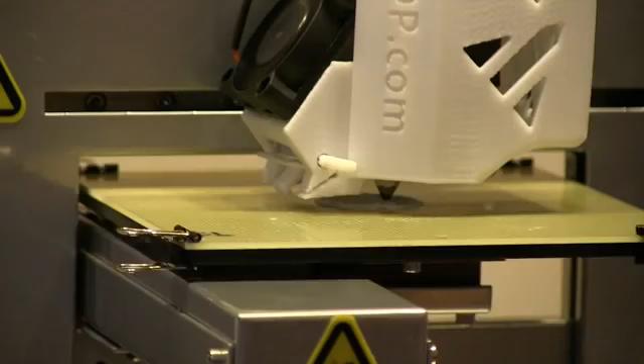Given that 3D printing is already a multi-billion-dollar industry, more and more companies are keen to get involved. Aside from 3D printer manufacture, several business opportunities now present themselves, notably including enhancing product design, transforming traditional production, direct digital manufacturing, and facilitating personal fabrication.

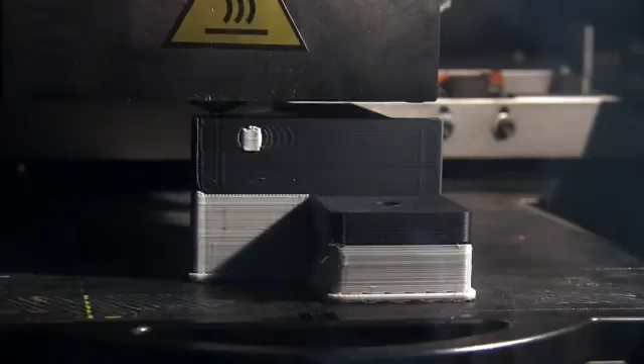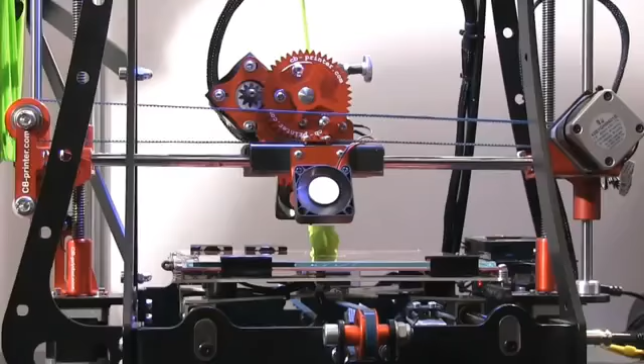Today, most large manufacturers use 3D printers to create rapid prototypes that speed or otherwise improve their product design. The use of 3D printing for this purpose is therefore not revolutionary. This said, as desktop 3D printers get cheaper, more accurate and more reliable, opportunities are starting to exist to create concept models and prototypes far earlier and far more frequently.

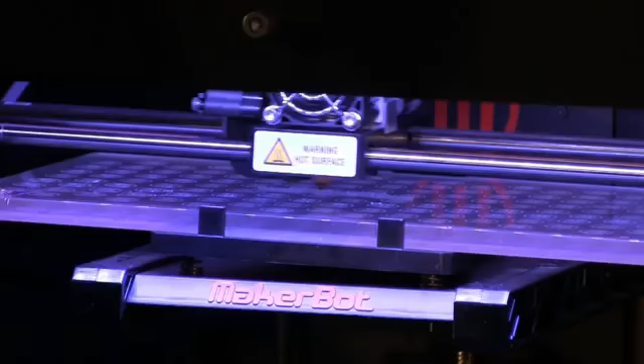Only a few years ago, an industrial stereolithographic 3D printer cost at least $100,000. And yet, in November 2013, a desktop model called the Form 1 will start shipping for $3,299. It's also been reported that some Ford engineers now have MakerBot consumer 3D printers on their desks.

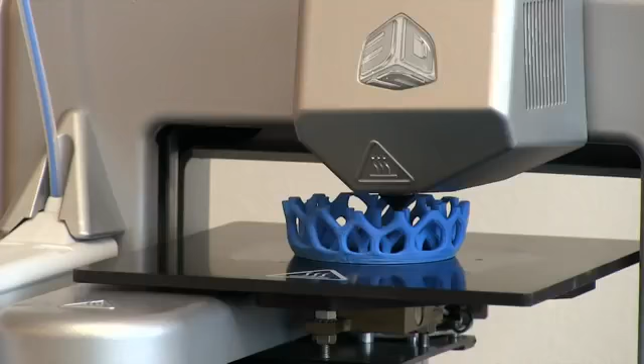The question for manufacturers is therefore not whether they're using 3D printers in product design, but where and how frequently. Just as personal computers escaped from corporate data centers in the 1980s and 1990s, so today it's time for 3D printers to invade a great many offices.

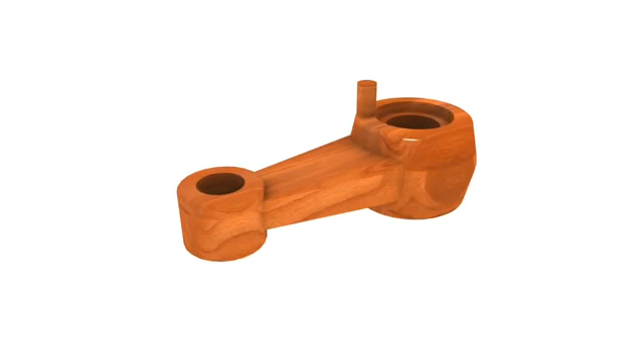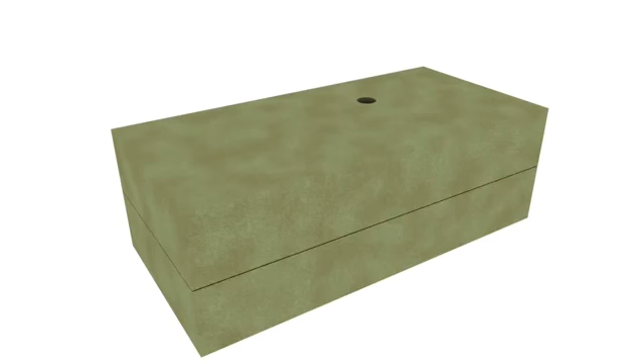Many traditional manufacturing processes are costly and time-consuming to tool up. For example, the production of metal parts using sand casting requires a pattern to be created around which sand is packed. The pattern then needs to be removed from the sand, which often requires the mould to be broken apart and reassembled. Molten metal is then poured in, which cools solid, and the sand is broken away to reveal the final part.

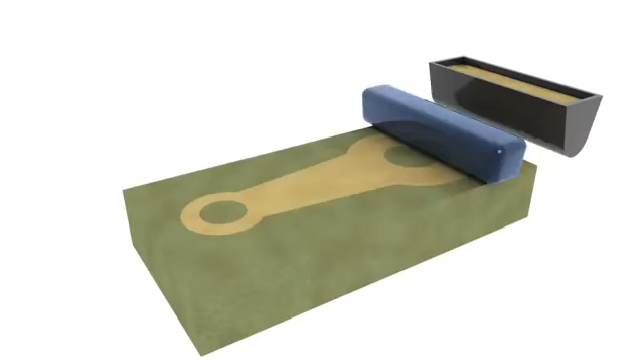Today, 3D printers from pioneers including ExOne and voxeljet allow for patternless sand casting. Here, layers of casting sand are laid down and selectively sprayed with a foundry-grade resin. This allows the direct and rapid creation of sand casting moulds into which molten metal is then poured.

By 3D printing sand casting moulds, manufacturers can save a great deal of time and money. For example, the US Navy has managed to reduce the lead time for producing submarine compressor pumps from 51 weeks to 8 weeks, and the cost per unit from around $29,000 to $18,000.

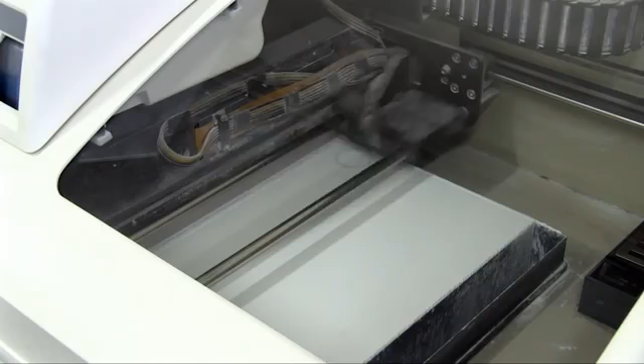Across many industries, similar opportunities exist to use 3D printing to reduce the time and cost of mould making or other production tooling, and this is something that no manufacturer ought to ignore. In the short and medium term, it's also the area of industrial 3D printing application with by far the greatest business potential.

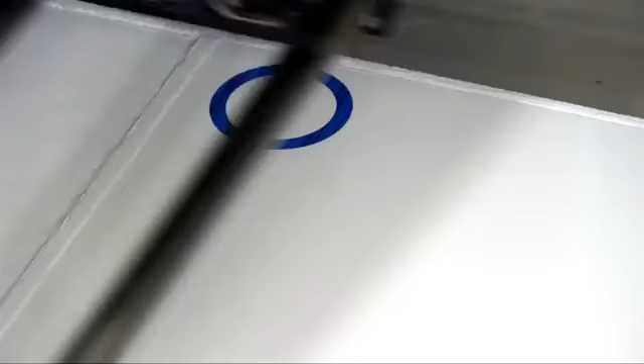As several pioneers now demonstrate, opportunities already exist to directly 3D print some final products or parts thereof. For example, Nervous System 3D prints lamps and many items of jewellery. Via an app on the Nervous System website, customers can even create custom products, which Nervous System then gets 3D printed in nylon using the Shapeways 3D printing service.

Another artist using 3D printing to create her products is Bathsheba Grossman. As she explained, with the advent of 3D printing, this is the first moment in art history when sculpture can, in a sense, be published.

Other pioneers include Makie and That'sMyFace.com, both of whom are using 3D printing in toy manufacture. On the Makie website, customers design their own unique dolls that are then 3D printed. Meanwhile, over at That'sMyFace.com, customers upload a front and side image of their head, which can then be 3D printed and added to a range of action figures.

Other companies creating customized products using 3D printing include Protos Eyewear, who are 3D printing spectacle frames, and Bespoke Innovations, who 3D print fairings for prosthetic limbs.

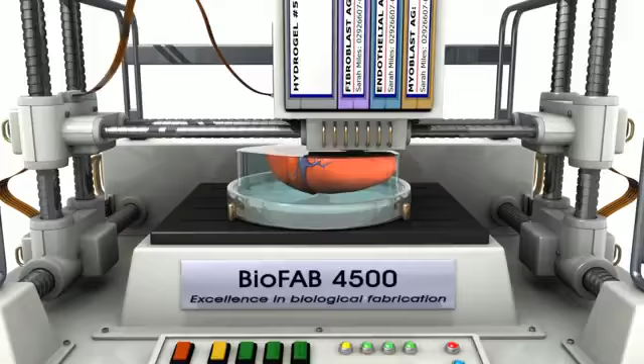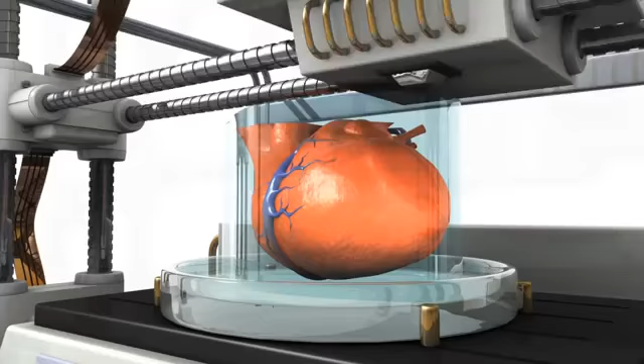Another and quite distinct form of direct digital manufacturing is bioprinting. Here, specialist 3D printers lay down layers of cells that fuse together to create replacement living tissue. Already, pioneers including Organovo have managed to bioprint human arteries and liver tissue.

At present, applications are limited to the creation of tiny tissue samples for drug testing. But within a decade or so, we should expect the first use of bioprinted materials in transplant surgery. In time, healing wounds by bioprinting directly onto the body may also become a possibility, something that is already being worked on at the Wake Forest Institute.

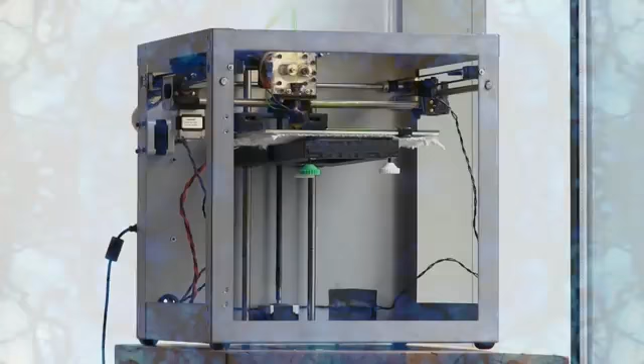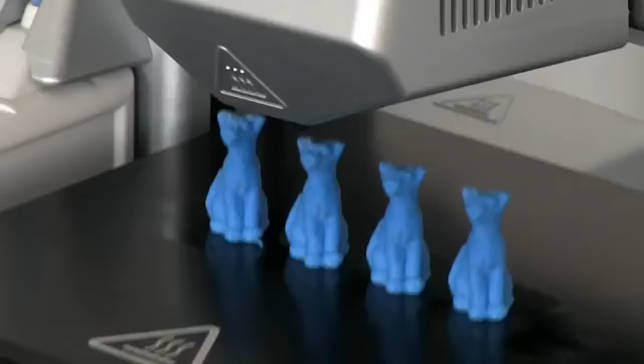Personal 3D printers can now be built or purchased for a few hundred dollars. As such hardware enters the mainstream, more and more people will be 3D printing things at home, and smart businesses are already starting to recognise this fact.

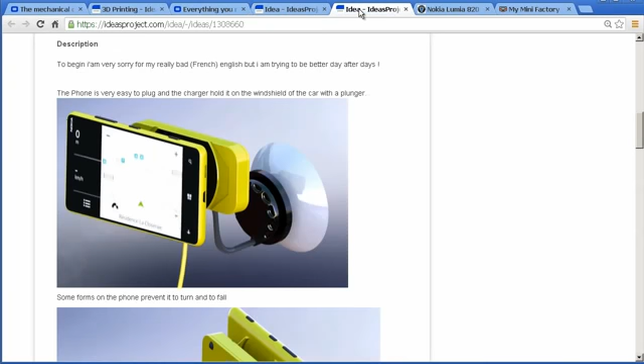For example, in January 2013, Nokia released a 3D printing development kit for its Lumia 820 smartphone that allowed anybody with 3D printing skills to produce a custom casing. And within only a few days, 3D printing enthusiasts were exchanging and showcasing their designs.

In addition to helping customers modify, personalise and repair their products, many organisations could very easily start to offer promotional 3D object downloads. Today, free apps or screensavers are common giveaways, and within a year or so, any marketing campaign that does not include 3D printable content will be missing an easy trick.

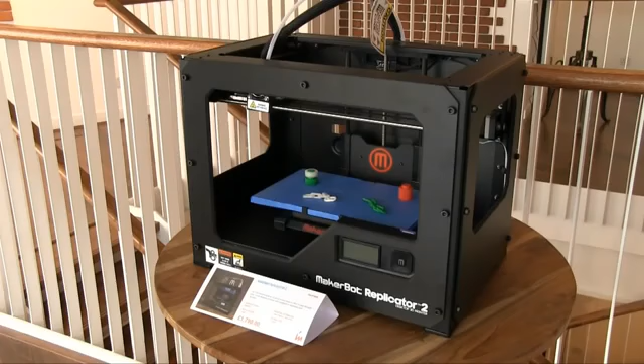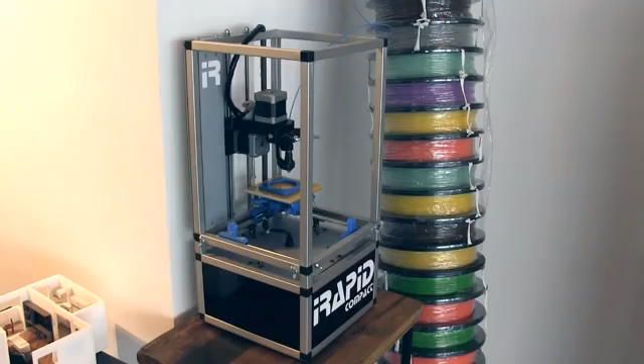In retail, there are also opportunities to start selling both consumer 3D printers and consumables, as well as 3D printing and scanning services. In 2013, some of the first 3D printer stores opened around the world. But right now, most people do not live near such a retail location, leaving a massive hole in many markets.

So, what do businesses need to know about 3D printing right now? Well, here are just a few of my own predictions.

Firstly, 3D printing will drive a revolution, but it will not replace most traditional manufacturing methods. Rather, within 10 years, I estimate that 3D printing will be used directly or indirectly in the manufacture of about 20% of products or parts thereof.

Secondly, the desire to achieve material savings will drive the adoption of 3D printing in many industries. This is due to the fact that 3D printing is an additive rather than subtractive process that can achieve minimal wastage. Thirdly, within a decade, scanning and digital inventory will have a big impact on spare part availability and product repair.

Fourthly, opportunities will increasingly exist for customised products with one or a few 3D printed parts. Today, far too many people are dismissing 3D printers as production tools because they can't manufacture an entire product. In sharp contrast, a few smart pioneers are starting to customise or otherwise transform their wares by adding just a few 3D printed components.

Fifthly, I believe that software development will determine competitive advantage for many pioneers of fully or partially 3D printed products. Soon, everybody will have access to the same industrial 3D printers. Successful companies will therefore be those that offer the best interface between their customers and 3D printing hardware. Finally, sometime in the 2020s or 2030s, bioprinting will become a standard medical practice.

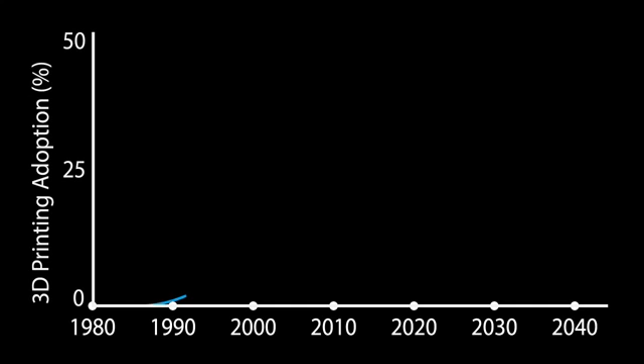The adoption of most new technologies follows a well-understood exponential curve, and for 3D printing, several of these can now be identified. For a start, since the late 1980s, 3D printing has been used for rapid prototyping. More recently, we've seen the start of adoption curves for the transformation of traditional production, direct digital manufacturing, and personal fabrication.

In a decade or so, all of these are likely to be mainstream activities. But before that occurs, there'll be possibilities for early adopters to achieve some significant quick wins.